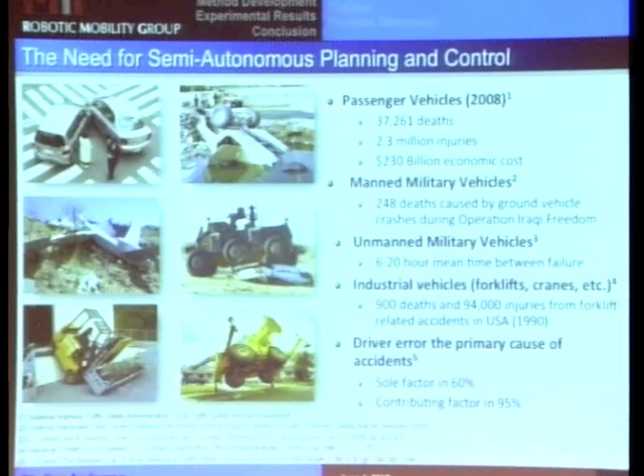There was a study done of collisions in the UK and the United States a few years ago in which human error was cited as a sole factor in 60% of collisions, and a contributing factor in 95%. So that's the statistic we're up against when it comes to overcoming human error.

I think a lot of people would ask, well, if human error is so detrimental, why not cut the human completely out of the loop? Why not a fully autonomous system? In fact, many autonomous systems have been proposed today that are very good, but for a number of reasons, we don't believe that humans will be ready for full automation for many years to come.

A few of those reasons include, number one, our superior judgment and reasoning. Particularly in military applications right now, the law on the books is that only a human can target and or fire upon an enemy combatant. For example, you don't want a bunch of Terminator-type figures running around shooting at combatants.

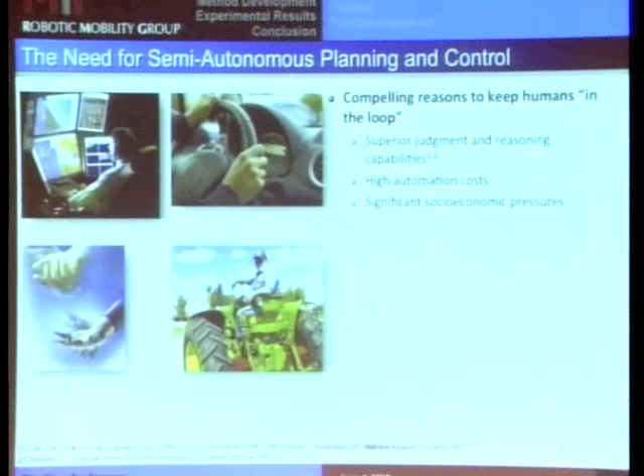There are high automation costs in many industries, and finally, there are significant socioeconomic pressures. In the United States, for example, were we to try to automate the transportation of goods, we would have significant conflicts with, for example, truckers' unions and others who would be looking at being out of a job were humans cut completely out of the loop.

So how do we do this then? Right now, the proposals sort of span two distinct sectors. We have full automation on one end of that spectrum, and we have ADAS, or driver assistance systems, on the other. Typically, as a general rule, full automation considers both strategic and tactical goals, with a planning component in a tiered subsystem architecture with a low-level controller.

Operator assistance, on the other hand, tends to be more tactical. It tends to be less predictive in nature and more focused on monitoring vehicle side slip in the case of stability controllers, or longitudinal side slip for anti-lock braking systems and traction controllers and others.

Where we are focused is somewhere between these. We've developed a semi-autonomous navigation system that aims to integrate some of the strategic elements of current autonomous systems, with regard to a capability of planning better routes for the vehicle if the human's inferred route appears unsafe, but also managing a lot of the low-level control aspects that will ensure the vehicle avoids collisions and losses of stability.

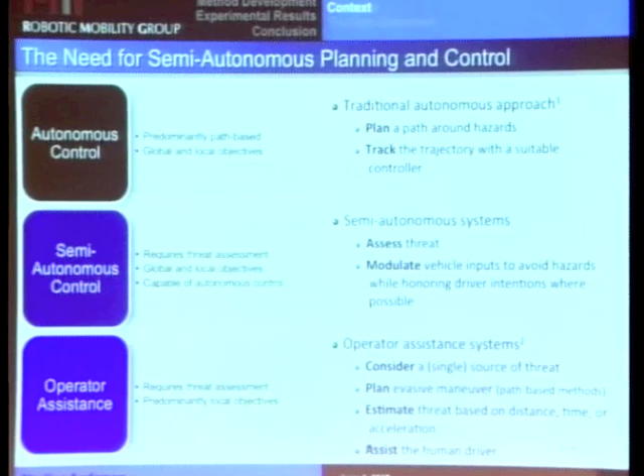So the basic approach to this, as I've outlined here: we assess the threat of a situation once we've designed a set of constraints, and we modulate or allocate control between human and machine in a fluid fashion to ensure that obstacles are avoided and collisions are avoided.

So some key questions that we have to answer when it comes to modulating control like this is: when do you assist the human, in what form, and how much? And all of this has pretty significant implications when it comes to human performance and human acceptance of that assistance.

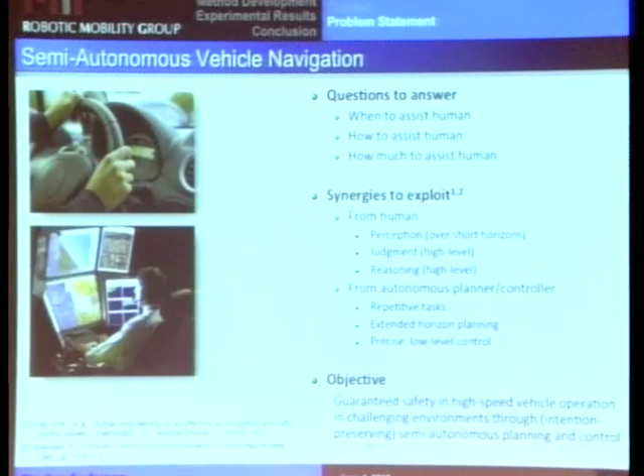Now, there are some synergies we think we can exploit between humans and automation. Humans tend to be a little better at perception, judgment, and reasoning. On the other hand, automation tends to be a little better at repetitive tasks, at precise low-level control. A lot of this was written about by our colleague Tom Sheridan years ago, and continues true in our research, and I'll talk a little bit about how it's borne out in some of our experiments.

So the key insight that's driven our approach - I'll use the phrase constraint-based a lot, and the reason for that is that's the principal differentiator of our work. We're focused explicitly on the design and selective enforcement of constraints rather than reference paths, which makes this work a little different, and in many ways a little better suited for this type of semi-autonomy. Here's the reason.

Humans tend to operate not along a specific path, but instead within a field of safe travel. For example, when you're driving a vehicle along the road, you typically see the lane that you want to remain within and constrain yourself to remain within it, rather than, except for maybe a few obsessive-compulsive disorder cases, controlling the vehicle only insofar as it keeps you within the lane. It's not super significant to you whether you're following a specific line on that lane.

And if we plan a reference path and control along it, a modular, fluid semi-autonomy approach can be over-restrictive at worst and arbitrary to the human at best. It can be difficult to determine, for example, if the human wanders two inches or a foot away from the line, is that when we start to apply control authority to get him back? Do we wait until he crosses the edge off of the lane into another? And so...

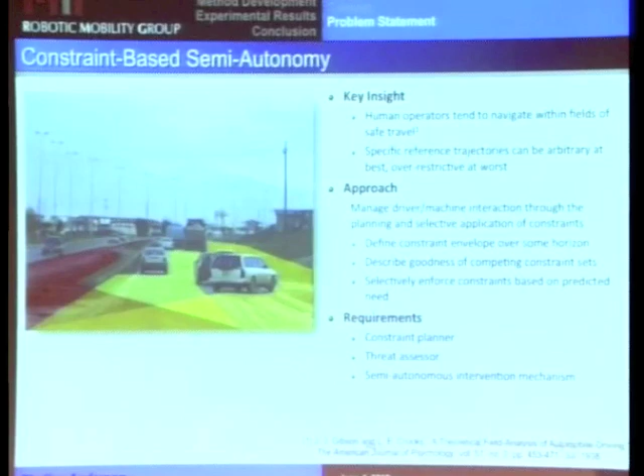We focus on how do you design the constraints that bound the region of the environment that the human should remain within? And then once you've designed those constraints, how do you apply them in such a way that you don't over-restrict the human from what he or she wants to do, but you also can ensure that any collisions are avoided?

So the requirements then are: first we have to design the constraints, then we have to assess the threat of the scenario - by threat I mean the nearness to instability of a predicted optimal vehicle path that satisfies those constraints. And then finally we have to design a semi-autonomous intervention mechanism, a means by which the autonomous controller can intervene when necessary to ensure that those constraints are satisfied.

So what you see here, overlaid on a typical view of an environment from a human's perspective, are three different path homotopies - I'll define that in a second - three different corridors or channels or fields of safe travel that you would typically identify as a first high-level identification of the environment you want to travel through. There's the green, the yellow, and the red, correlated with, typically you would likely see this green region as the safer one, in that it requires less immediate control action to remain within. But we'll get a little bit more into that.

First, I'd like to describe the system architecture. What we've done is use look-ahead sensing, which includes LiDAR and cameras for terrain and obstacle identification. From that, we pass a map of configuration space, or free space, to a constraint planner. That constraint planner identifies the feasible regions of the environment and designs constraints on the position of the vehicle, on its slip and other stability states, as well as on its control inputs, to ensure that it remains within that.

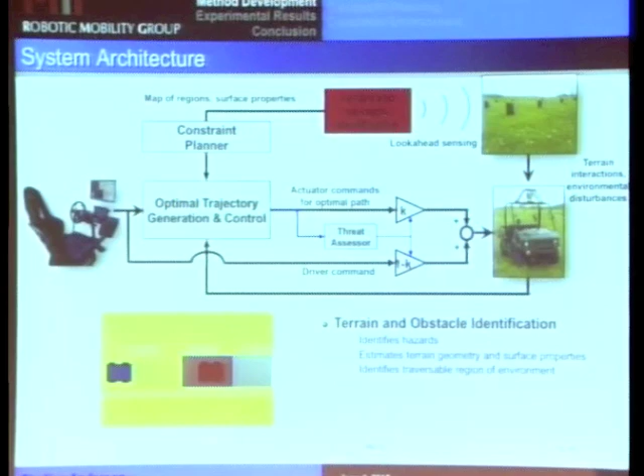And that is identified here by this red bounding. You'll notice that prior to that constraint planning step, going right or left would have been deemed a wash. But we've got to decide that a set of constraints cannot include any of these collision states. The constraint planner chooses which is safer.

And then we have an optimal trajectory generator and controller that's being done with model predictive control with a model of the vehicle. So that plans an optimal vehicle trajectory through those constraint sets that satisfies them and calculates an optimal sequence of control inputs.

Now, as those of you familiar with model predictive control will already know, a model predictive controller gives you, along with the sequence of optimal control inputs, also a sequence of optimal vehicle states, right? Each one of which needs to satisfy a set of stability critical limits or constraints as well.

For example, the slip on the tires, typically the tire friction force saturates around 6 to 7 degrees of slip on a passenger vehicle. Therefore, if you monitor each of these predicted states, if any of those approaches that limit, the edges of the stability envelope, that implies a high risk, or that even an optimal trajectory is getting near to the limits of vehicle stability, and there is some need for intervention to avoid losing control.

Finally, a threat assessor does exactly what I just described. It looks at the predicted states, assesses how close we are to instability, and in accordance with that nearness to instability, it makes a decision as to how to allocate control between the human and the controller to ensure that we avoid collisions.

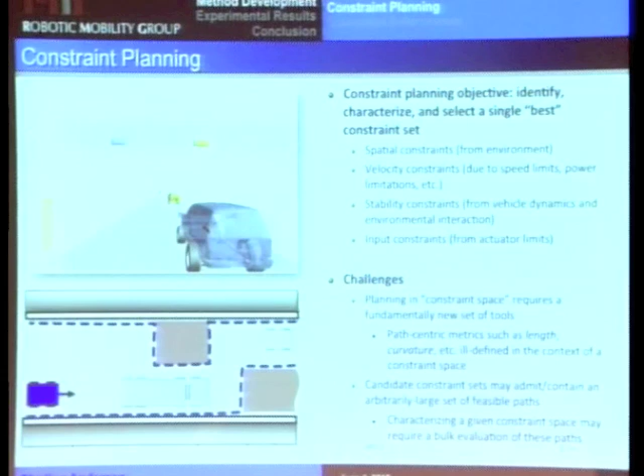What we're focused on is how do you design constraints to bound those. Here you'll notice a simulation where I've overlaid the blue vehicle with the controller in the loop. The gray is what it would have done given a zero driver steer input. And what it's doing is planning constraints around these objects in the environment, or the collision states, and then using the model predictive controller in this semi-autonomous fashion to intervene, where the intervention is shown in green here as a percentage, in order to avoid these obstacles.

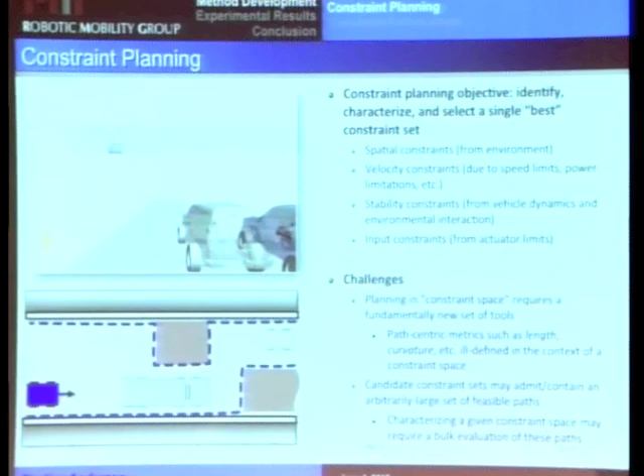But here, the challenge with designing constraints—we're all used to designing paths, right? And a lot of path planning literature has been developed for a long time. But when it comes to designing constraints, it becomes a little bit more difficult to characterize, for example, what's the length of a constraint? What's the width or curvature or dynamic feasibility of a constraint? All of these terms and metrics are well defined when it comes to path planning. They're not well defined when it comes to a set of constraints which can bound an infinite number of vehicle paths. So that was the challenge we set out to address.

And we wanted to figure out how exactly do you characterize the goodness of a set of possibly infinitely many homotopic paths that pass through an environment. Let me just describe this word homotopy before I go on. For those not familiar, a homotopic class is any set of paths with the same starting and ending point that can be continuously deformed without crossing obstacles.

So for example, in the common driving scenario, a homotopic class would be a lane. If you were out in unstructured terrain, a homotopic class would be any set of paths you can take that takes a certain route through the trees.

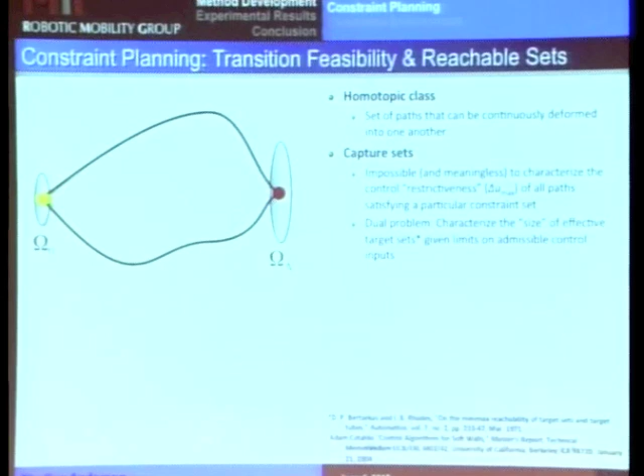Now, one of the important considerations for us with regards to homotopic classes was that each path in a homotopic class has to traverse a specific capture set. When I talk about capture sets, what I mean are any of the set of states that exist within that homotopic class across which every path existing therein will cross.

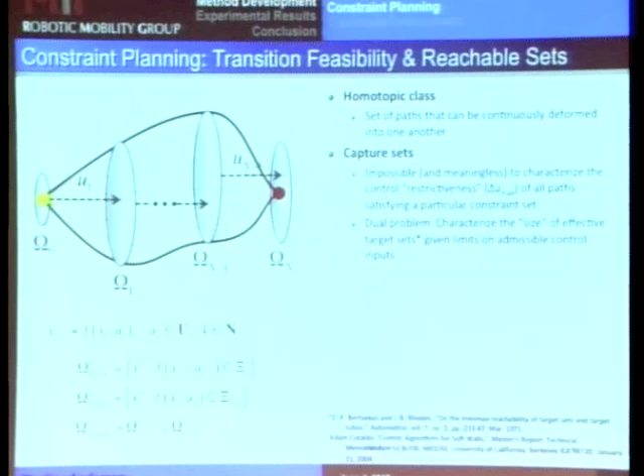And as the vehicle—if we use a number of metrics, which for the sake of time I won't get into, to describe how the state evolves from one capture set to the next, we can describe the bulk dynamic feasibility of a constraint set.

And that, in essence, becomes our metric for goodness of a given constraint set. As you'll notice, there are a number of constraint sets that could exist. We could have taken any of these homotopic classes, but using some geometric constructs, which you can read more details about in the paper, we can design a chosen homotopic class.

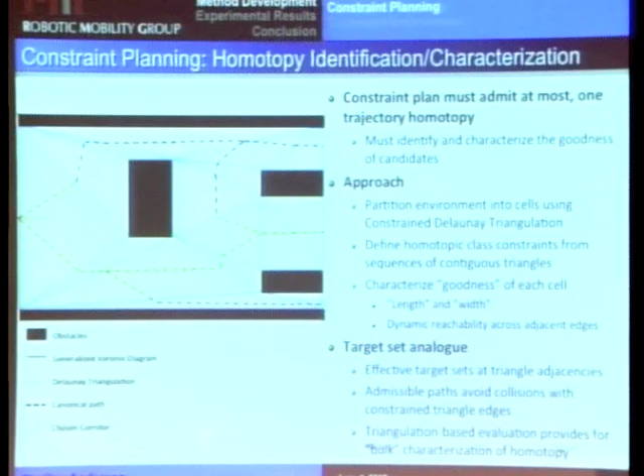Now, some of you will notice that this looks an awful lot like, when we use constrained Delaunay triangulation, some of these metrics look a lot like the Voronoi diagram. The reason for that is quite simply that the Delaunay triangulation is the geometric dual of the Voronoi. So that gives you some indication of the length of the medial path that traverses a given homotopy. So I'll skip through that.

So what I want to describe now is how we enforce those constraints, what the mechanism is for semi-autonomous intervention that we've used to ensure that we can traverse this homotopy without colliding.

As I mentioned, low threat means those predicted states are far away from the bounds of vehicle stability. High threat means they're very close. What we do is configure the controller to satisfy constraints while minimizing any of a number of vehicle states that indicate stability. It can be lateral acceleration; in our case, we use front wheel side slip. And we call threat the nearness to instability, as I've mentioned.

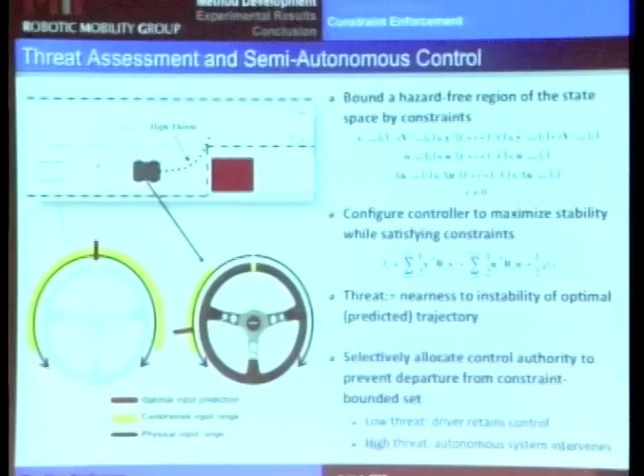Here you'll see a simulation showing what was happening in that vehicle simulation I was showing you earlier. The trace of the vehicle is here in blue. The red is the predicted trajectory of the vehicle, and the green are the constraint sets. You'll notice that as the predicted trajectory begins to bend, the predicted states become nearer to the limits of stability, and in accordance, our control authority is allocated here.

When control authority allocation is 0, that means the human has full control, which is as we'd like it to be. As a need for intervention arises and the human does nothing, that intervention increases just enough to ensure that the controller can turn the vehicle around and satisfy the constraints.

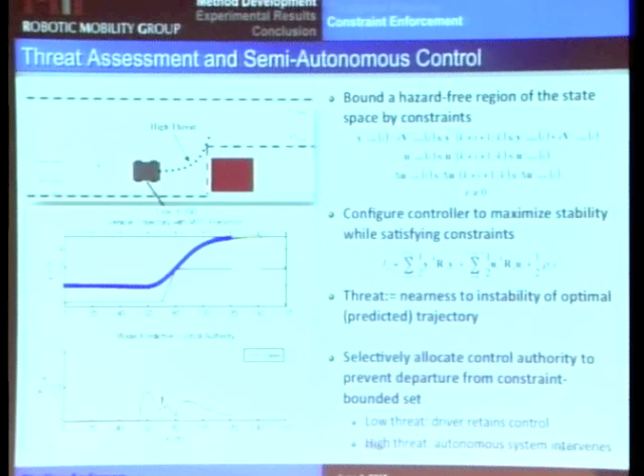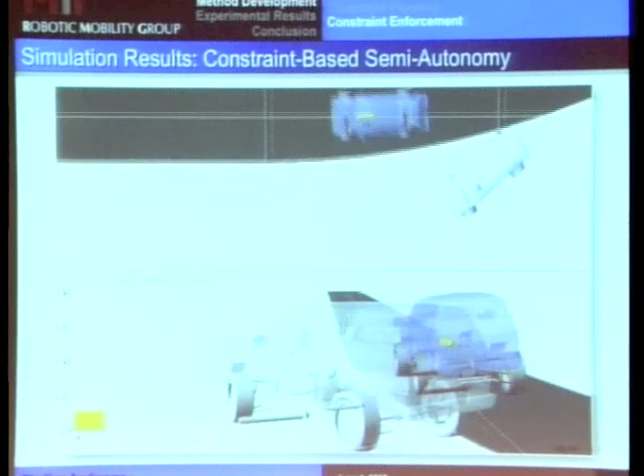So here you'll see again, the blue vehicle shows with semi-autonomous controller in the loop. Gray vehicle shows without it. Here I've used a poorly tuned pure pursuit controller for my driver model, and that shows that I tuned it poorly for a reason, just to demonstrate that the same driver model is being used in both cases.

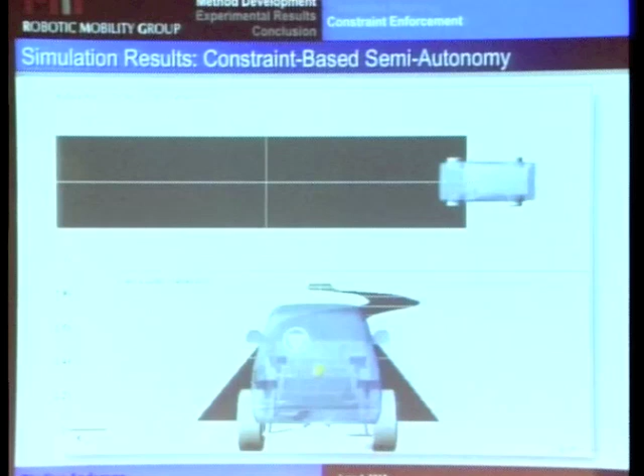Here on the left, it shows you how much control authority is being allocated to the controller in the blue case. I would note that for a lot of drivers, for example when we had some drivers up at Ford test this for us, you don't notice intervention below about 60%. It just kind of feels like you're doing a great job, and you're not sure how much the controller is intervening, and that's as we'd like it to be.

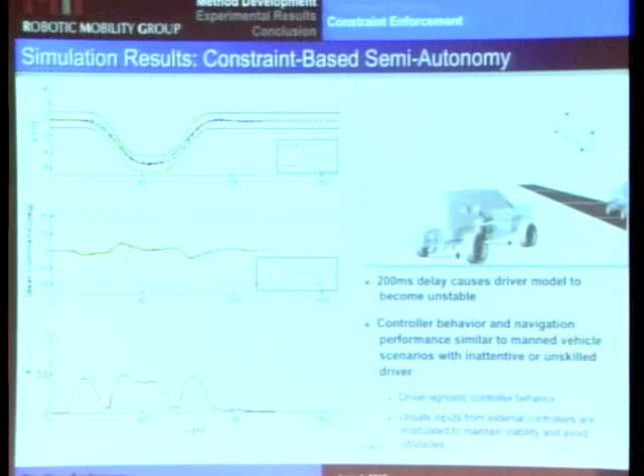So if we introduce a delay, here's the trace of the vehicle path. You'll note, as I mentioned, we're only imposing constraints on the position of the vehicle; we're not imposing a reference path. But the interesting thing here is the reference path for the driver model is the very center of this lane, this blue dashed line. Notice that when the controller is off, in the gray case, the driver in this yellow line loses control and leaves the roadway.

When the controller is on, not only does it stabilize and keep the vehicle within the lane, it enables the driver to keep it closest to whatever reference path he or she would like, which, as I mentioned, drivers don't typically choose reference paths, but if they had, or if they did, this is actually an enabler. Notice how the trace of the vehicle, the red line, actually stays very close to what the driver model in this case is trying to track.

Another place where this works quite well, and will motivate the final set of experiments that I'll demonstrate, is in teleoperation scenarios. In teleoperation, one of the big problems tends to be time delay, both in sensing and in control. There's a 200 to 500 millisecond delay between when control inputs are sent and received at the vehicle. That time delay tends to destabilize a lot of drivers. And here I've done the same scenario, but with time delay, and we get a very similar outcome.

If we run this controller on the vehicle itself, and therefore not subject to that same time delay, it is again able to stabilize the vehicle while still allowing the human significant control when the human's inputs are safe.

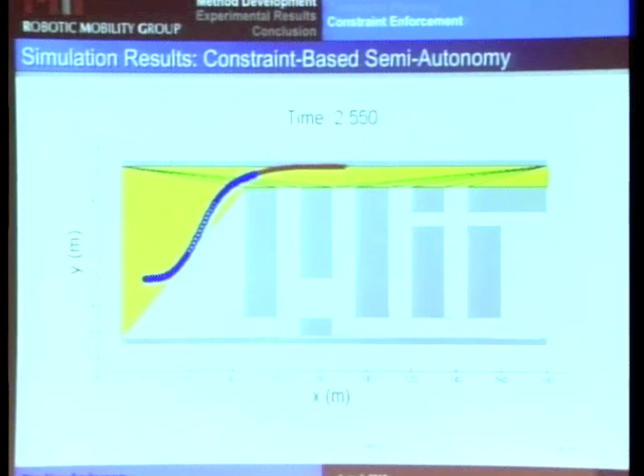So here I'm just demonstrating the same controller as it would be performed through an arbitrary obstacle space. Here the constraint planner is planning via these Delaunay triangles. If we throw in an additional obstacle, a naive path planner would have chosen this sort of tortuous path, which is unachievable via model predictive control. If instead we integrate the capture set or dynamic considerations, it in fact plans what turns out to be the better homotopy.

Finally, I want to show how this has been implemented in an experiment on a teleoperated vehicle, and then we'll take a few minutes of questions.

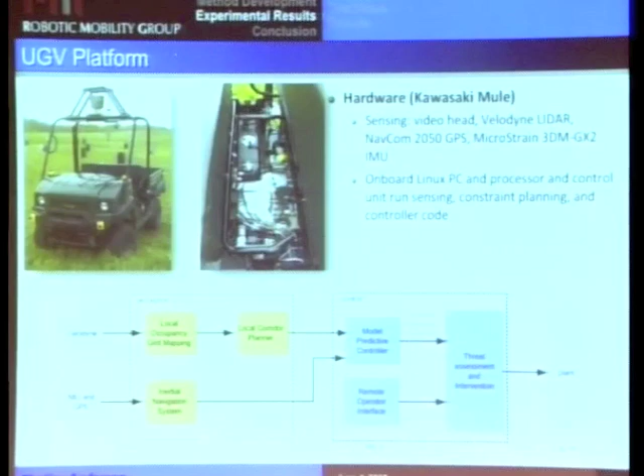The hardware we're using is a semi-autonomous Kawasaki Mule, developed in collaboration with our partners at Quantum Signal in Michigan. Sensing is done via Velodyne LiDAR, and we've got a video feed up front for the teleoperator to view, a Navcom GPS, and a microstrain IMU. We've got a PC on board running the control code, so it's not subject to latency or communication issues.

For some of our tests we've given the operator, who's just an untrained guy with a driver's license but nothing more, a task from a teleoperated station inside a barn where they can't see the vehicle via line of sight, relying only on the monitor. We want you to navigate this vehicle from start to the other end of an obstacle field, and we don't want you to hit any barrels.

We're going to throw challenges at you. Number one, we're going to cut out the video occasionally, so you'll be driving blind, which would be common if sensors or cameras were obfuscated by sand, fog, or otherwise. We've also asked them to perform a secondary task on a different computer, common in military applications, and we've introduced communication delays of 500 to 2,000 milliseconds. We've done over 400 user trials to date with very good results, which I'll describe.

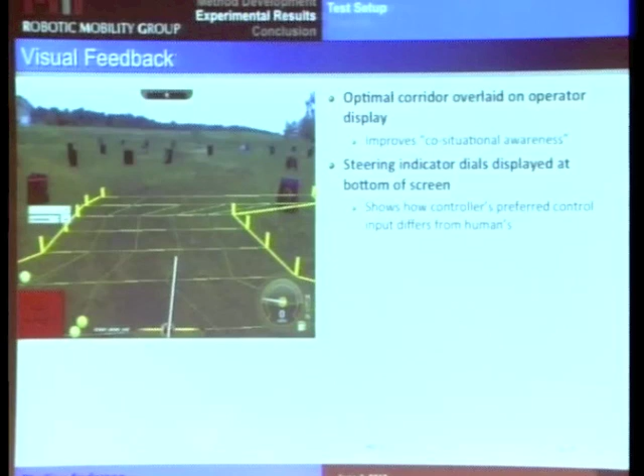There are a couple of feedback mechanisms we wanted to provide to the human. Number one, and we're quite excited about this: when we plan these constraints, since humans already tend to operate with this sort of constraint frame of mind, we can help the human identify the preferred homotopy, the lane - we call it the yellow brick road - that would be best to follow for dynamic and safety considerations. That's overlaid on their screen along with an indicator of what the vehicle is doing. Here's another example of that.

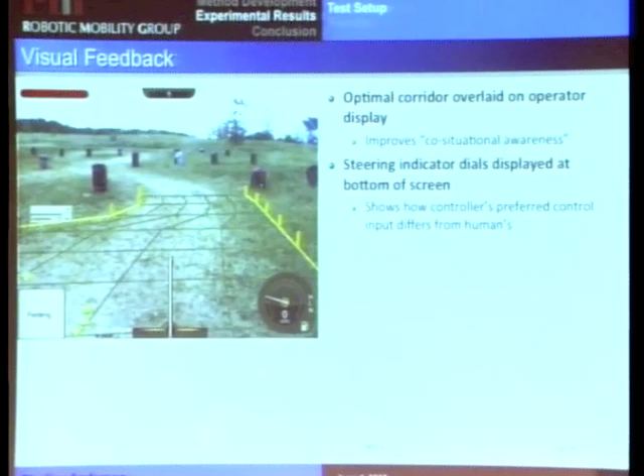We won't talk about this today, but we've also recently started testing a reduced fidelity sensory feedback where they don't even get video. All they get is the yellow brick road being sent from the sensing computer, so we can reduce bandwidth substantially. All they see is this, and they actually tend to perform quite well - they can stay within the lane we've outlined for them.

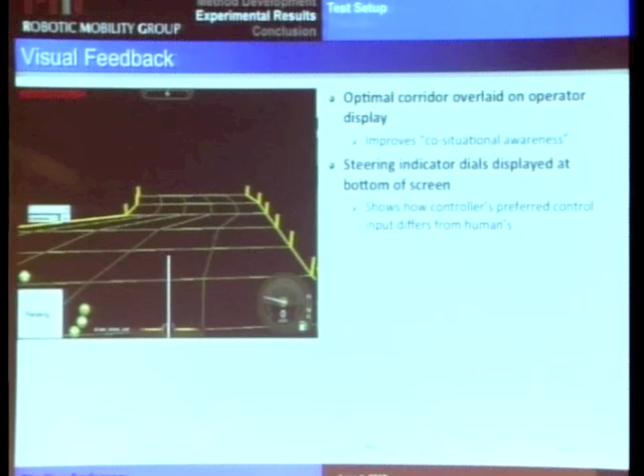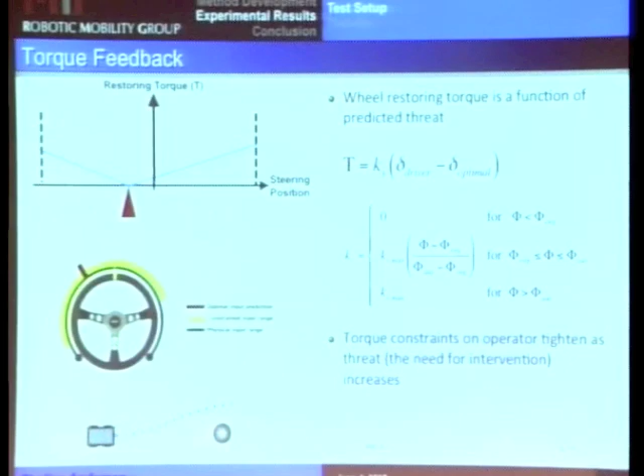I'll skip through this briefly, but we're also providing torque constraints or torque feedback to the human. The way we're doing that is: here's the optimal input, and as the vehicle approaches something and that optimal input becomes more urgent in order to avoid the obstacle, we increase the stiffness on deviation from the controller's optimal input. So what ends up happening is the steering wheel begins to pull one way - not that the operator allowing it to go that way is critical, because the vehicle will do that regardless - but with the objective of improving the operator's situational awareness, we move the steering wheel towards where the vehicle is actually going, so they know what's happening.

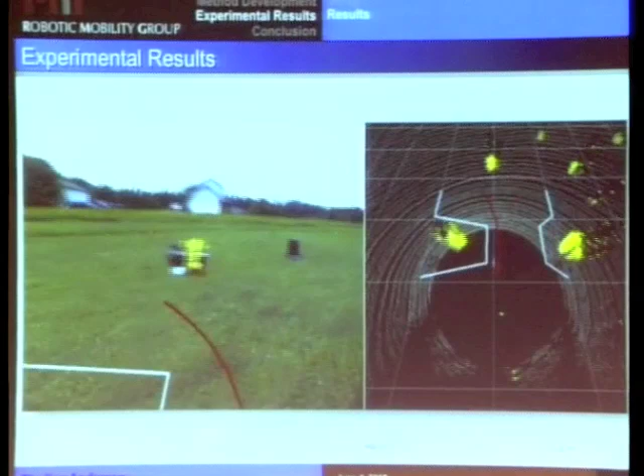Here's a video illustrating this approach. You'll notice the cyan lines are the constraint set - you'll see the corridor through there. The red is the predicted trajectory.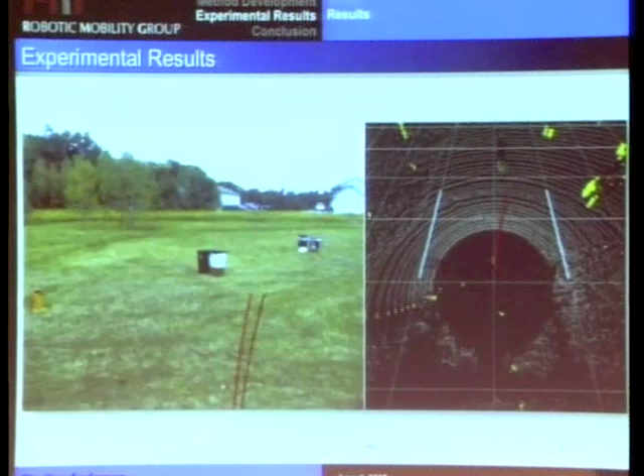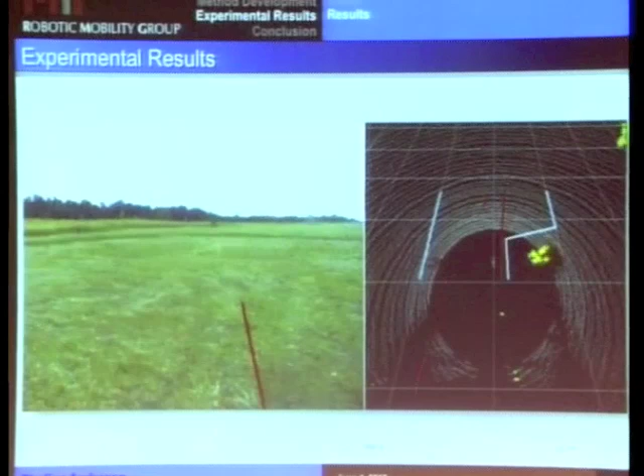Notice that in most cases, as the driver drove through, we allowed those constraint sets to change as the driver pushed the vehicle to one side or another. But as we came close to the bush here at the end, that was deemed a critical constraint, and we didn't allow the driver to collide with that.

This controller tends to reduce oscillation in the driver commands when there's delay. Here's with the controller, and there was without.

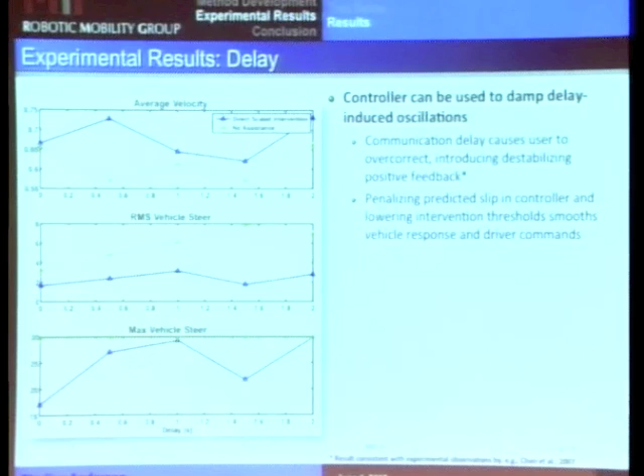We also show a number of improvements in, for example, average velocity. Drivers tended to feel more comfortable with the controller in the loop because they didn't feel like they were going to hit things, and they drove a little faster. They used less of the steering in every scenario without our controller in the loop. The driver saturated the steering input at one point or another; with it, they didn't.

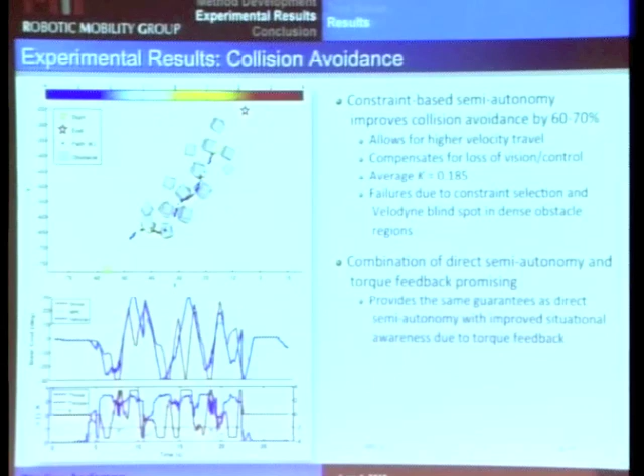I'll let you read through the paper to see more of this, it's a little difficult to see here. But bottom line, the constraint-based semi-autonomy improved collision avoidance by 60 to 70% in each of these trials. We attribute that final 30 to 40% margin to the significant blind spot we have with our current LiDAR setup, which we've since resolved, but it's definitely in the results you'll see in this paper.

That's about it, I'll just conclude briefly. We've designed a constraint planning mechanism that, as far as we can tell, is novel. We designed a mechanism for allocating control between human and machine to ensure that the human's inputs are honored where possible and overridden where necessary, and only as much as necessary to avoid collisions.

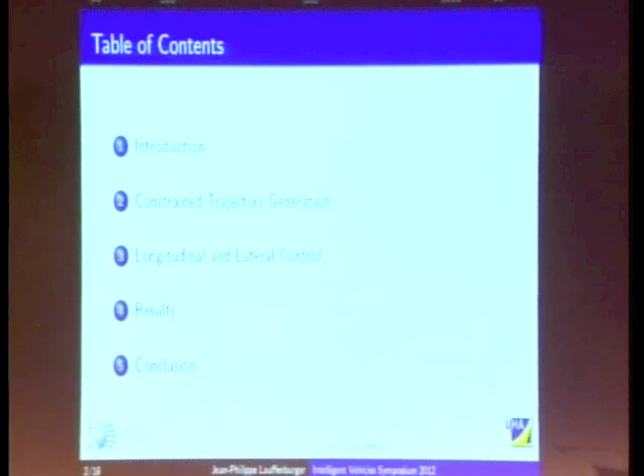The outline of my presentation will be as follows. I will briefly introduce the topic, then focus on the two main parts of the presentation: constrained trajectory generation and the use of this reference generation for longitudinal and lateral control of car-like vehicles. Then I will show some simulation results before a conclusion.

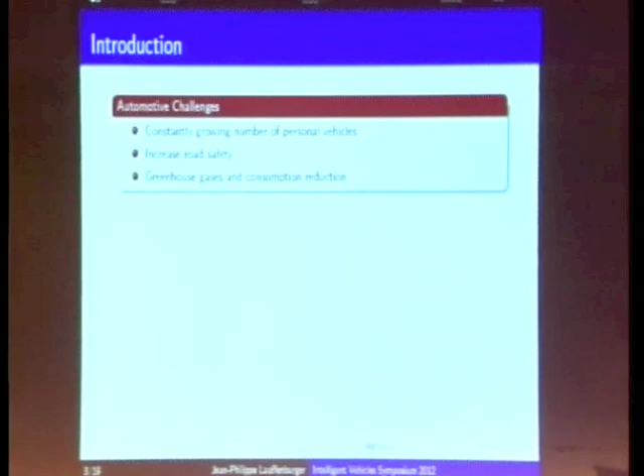Currently, car manufacturers and researchers have to deal with three main issues. The first is a constantly growing number of personal vehicles on the roads. At the same time, we would all like to increase safety during driving situations. And also the third issue, which is growing currently, is to try to reduce greenhouse gases and fuel consumption of our cars. Keeping the balance between these three aspects will be quite challenging for the next years.

If we look at solutions based on driver assistance systems, there are currently a lot of available systems on the market, ABS, ESP, and so on, but none of them, or roughly none, are integrating the ecological aspects of gas emissions or consumption.

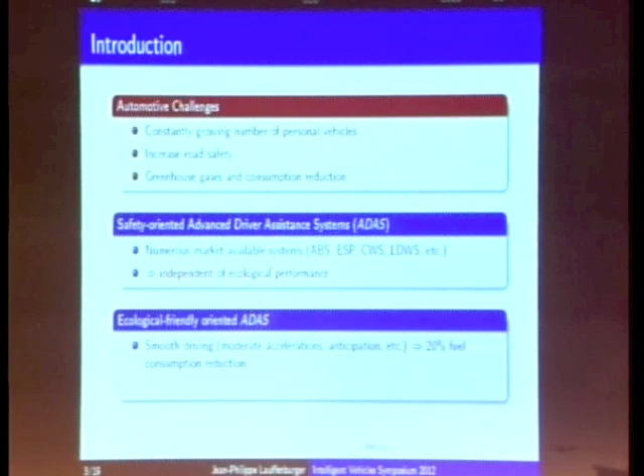One emerging field of research is to develop ecologically friendly, so-called eco-friendly driver assistance systems. This morning we had a presentation from Chris Hermson, who mentioned that smooth driving can lead to effective fuel reduction, more or less 20%, based on recent studies from 2010. What is smooth driving? It means using smooth accelerations to anticipate traffic congestion, but also driving perhaps under the legal speed limits. Unfortunately, there are only a few studies dealing with this approach. I saw last year at the IV conference only one paper dealing with fuel reduction in ADAS systems.

The final goal of our work would be to develop a driving assistance system which integrates safety and ecological aspects. But here the main topic concerns the first step of this development, which is a coupled control strategy based on longitudinal and lateral control of the car.

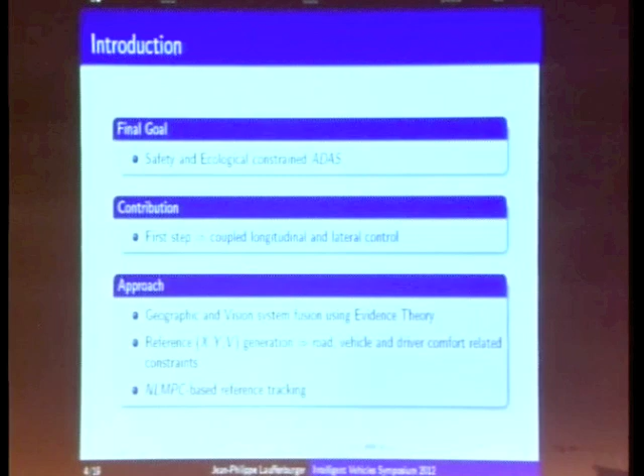Our approach is based on the use of a perception model presented last year at the conference. This is a fusion between a navigation system based on a digital map database and a vision system that detects traffic signs, especially speed limit signs. Based on this information about driving situations, we define a reference trajectory and a reference speed profile for the longitudinal and lateral controller. Finally, the control aspect is done using a nonlinear model predictive controller, which was introduced by Sterling just before.

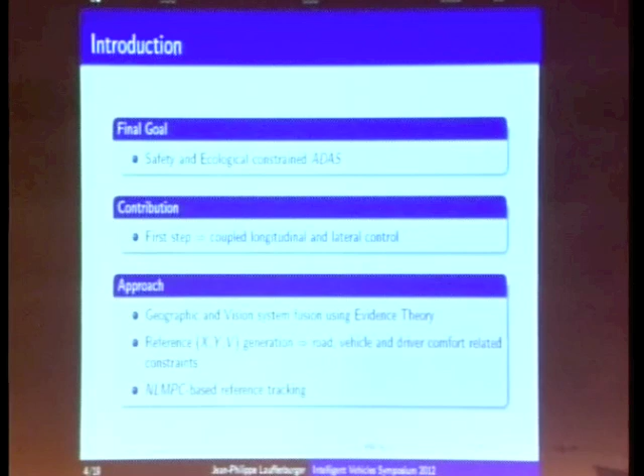Let's have a look at the vehicle guidance principle we have adopted. Considering the vehicle with steering actuators and propulsion actuators, the engine, the first idea is to perceive the environment of the vehicle using a speed limit assistance system. I will not go into the detail of this system, you can find references in the paper. The main idea is to detect and inform the driver about the speed limit he should not exceed during his driving task.

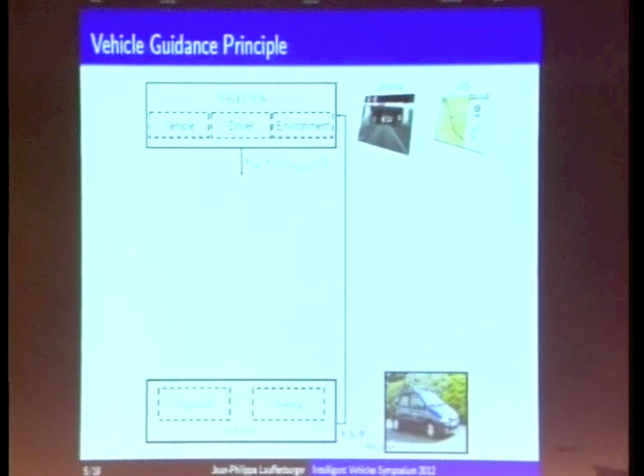Once we've located the vehicle on the map, we are able to compute two references: a trajectory reference and a speed profile reference, which are then used by the controllers, namely the lateral controller based on an MPC solution. So we'll go first into the detail of the reference generation module and then into the control module, which is the core of this presentation.

So if we consider that the vehicle must go from a starting point to a given destination, and that this track must be on the road, included in the boundaries of the road, we can, by considering the vehicle and the width of the vehicle and the width of the road, define what we call a validity area in which the trajectory can be constrained. This means that during this particular path, the center of gravity of the vehicle should not go out of these constrained boundaries.

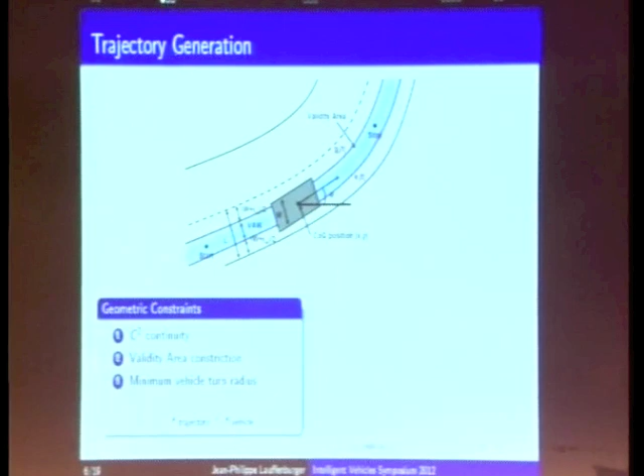We can also add on top of that some other geometrical constraints. For instance, the curvature continuity constraints, which will be important for the steering, and also some constraints related to the geometry of the car, so the minimum turn radius. And we can also integrate in this optimization problem some kinematic and dynamic constraints in order to avoid, for instance, excessive lateral accelerations.

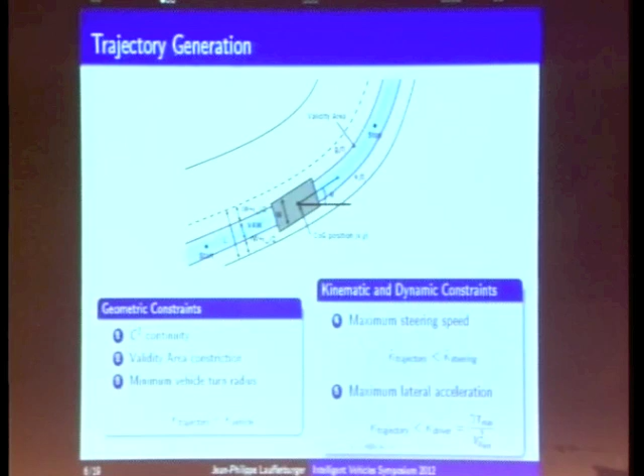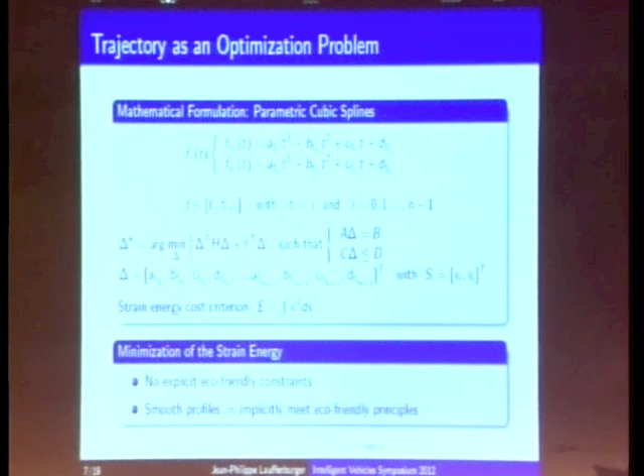So, what is the idea about minimization of the strain energy? The idea is that if we have smooth trajectories, without high variation of the curvature, we should probably implicitly meet some eco-friendly concepts. So the smoothness of the curvature will allow us to have a smooth trajectory, as mentioned this morning by Chris, and then probably be able to reduce the car consumption.

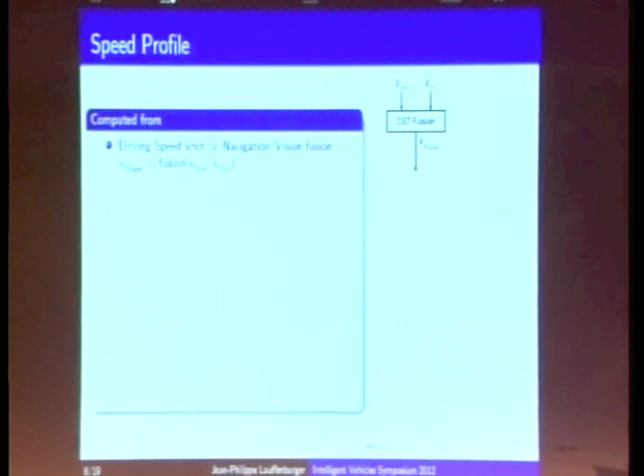Let's talk now about the speed profile which will be associated to this reference trajectory. So first, one speed information will be provided by the perception level, the speed limit assistant, which uses the detection from the traffic signs with the information provided by the navigation system.

After that, we are also taking into account the road topology because the speed profile should match with the generated trajectory. So based on the reference trajectory and its curvature, we are computing a speed limit profile using a very simple model defined in the literature, which only limits the lateral acceleration during that path.

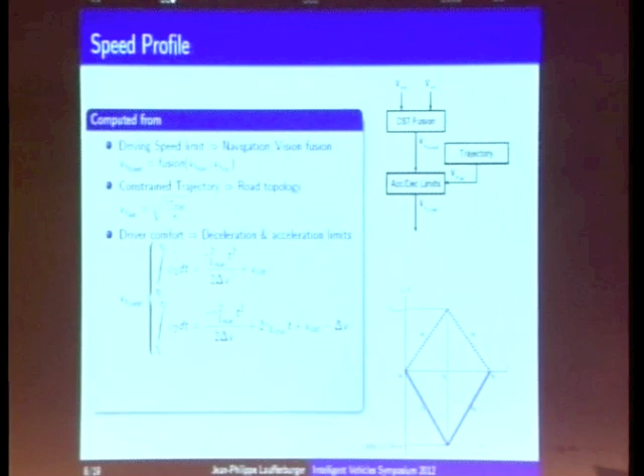Finally, we have also integrated some comfort aspects in order to limit the variation of the decelerations and accelerations given by the driver. These are comfort aspects, but smooth deceleration and acceleration are also related to fuel consumption. So the idea is to use a triangular shape for the acceleration or deceleration phase and to recompute in real time the speed profile in order to adapt it to this triangular deceleration or acceleration shape.

And the last step is a verification of the speed limit of the speed profile which has been generated, in order to ensure the stability, the lateral stability of the vehicle.

So now that we have a better idea about the reference that we are using for the controller, let's see how we've implemented these controllers.

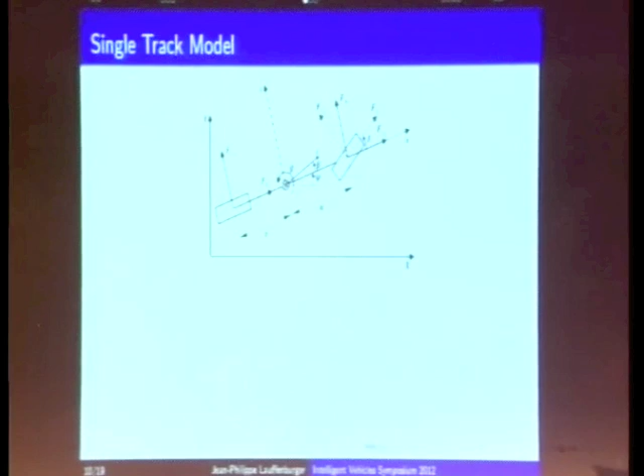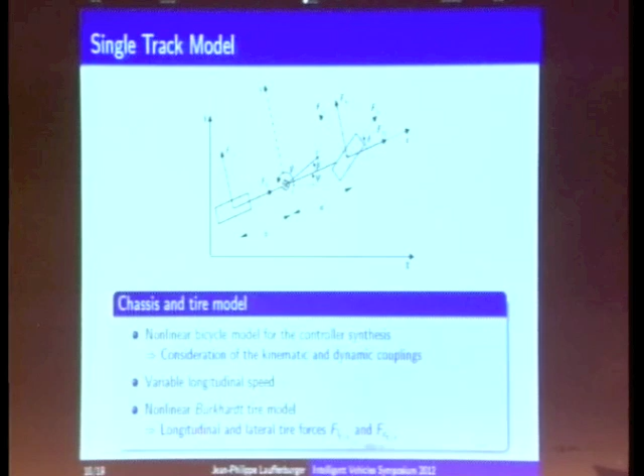So the nonlinear model predictive controller is based on the single track model, a very famous model. We are using a nonlinear bicycle model for the controller synthesis, which allows us to consider coupled dynamics and kinematic constraints. It is used under the assumption of variable longitudinal speed. Our speed profile will not be constant during the whole path, as I will show in the simulation. And finally, we've integrated in this model a nonlinear Burckhardt tire model to estimate the tire forces.

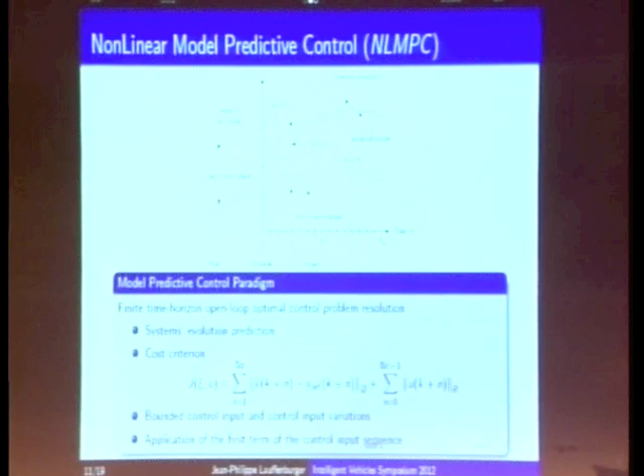I will probably skip this slide briefly since it had been presented previously by Sterling. The idea is just to recall the assumptions of model predictive control. If you have a reference trajectory, the model allows you to define the predicted output of the system. Based on this predicted output, by minimization of a cost criteria, you can define the control sequence for your system. Basically, you can also add some constraints on the control inputs and on the control input variations to limit their values.

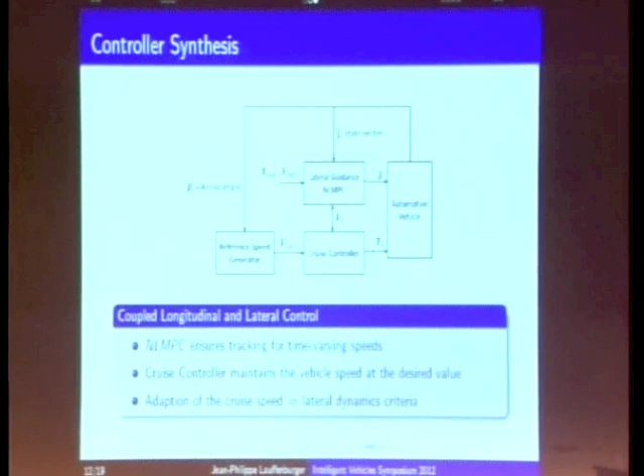So the scheme that we have adopted here in this work is presented here. We have our lateral guidance system based on the NLMPC and a classical cruise controller to maintain the reference speed, and the coupling is ensured by the variable speed, which is considered by both systems. The NLMPC ensures the tracking for time varying speeds, and the cruise controller allows maintenance of the vehicle speed. This variable vehicle speed has some effects on the lateral dynamics of the car.

So now let's go to the results that we have obtained with this solution. First I will show you the implementation on our test car. This part has been completely implemented on the test car and validated in real-time conditions.

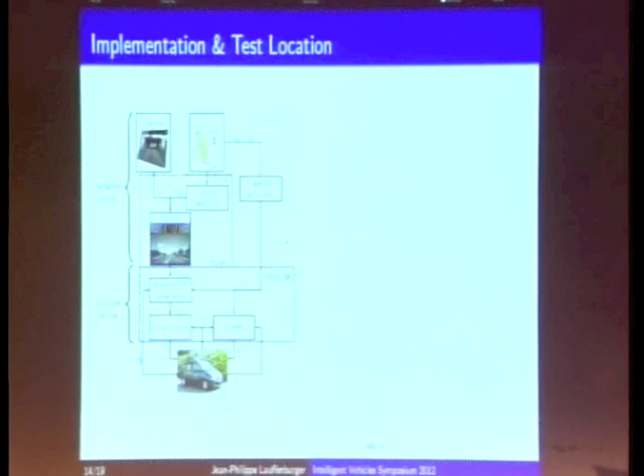So we are using the navigation system provided by Navteq, called ADASRP, to locate the vehicle and generate in real time the trajectory using the spline model. The data from this navigation system is fused using RTMaps software from Intempora with the camera detection of the traffic signs. Once we get this information and the reference trajectory, we use these references to generate the speed profile and then do the simulation in MATLAB Simulink for control of the car.

This part is validated offline, so in simulation.

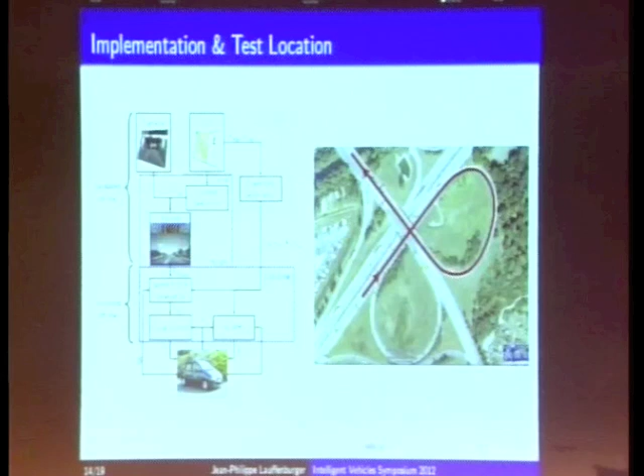The test I will show you represents one sequence recorded on a typical highway close to the university in Mulhouse, in the east of France. We'll go through a highway exit ramp before a variable radius curve, then reach another highway and perform a lane change before getting into the next highway section. We will have an important speed, 110, and will then have to sequentially brake until 50 kilometers and maintain 50 kilometers, which is the legal speed limit for the whole bend, before reaching the straight line.

This first video shows the results of the perception and of the SLA, the speed limit assistance system. You will see here the trajectory, the path that we will follow. On the right side, you will have the information provided by the navigation systems after an internal fusion of some information. On the left side, the results of the speed limit traffic sign detection, and in the middle, the results of the fusion.

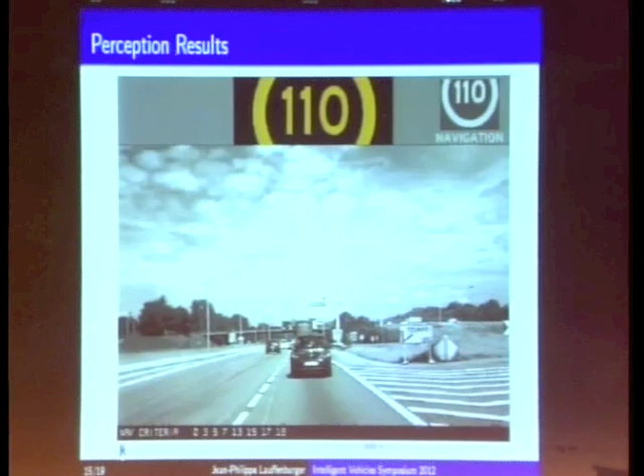This has been recorded and these tests have been done in real time, and at the same time we've computed the reference trajectory which will be used for the control. Here we will follow this car, take this exit bend, and you'll see that we have detected a speed sign limiting the speed to 90 kilometers per hour, and then we will take progressively the right turn.

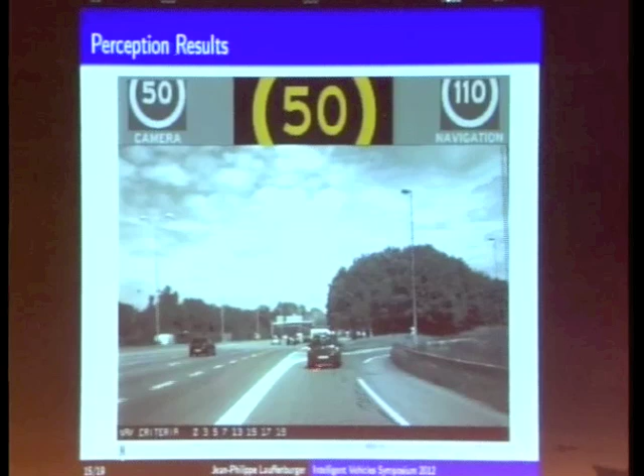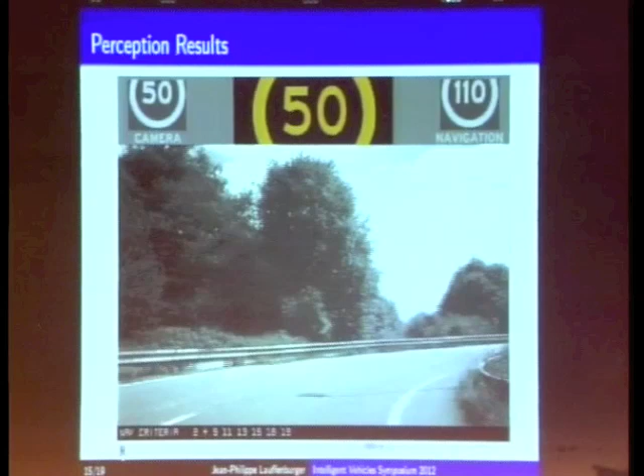A new traffic sign has been detected and the system already changed. Now the speed is limited to 50 kilometers until the end of the bend. Here we are in real-time conditions, so we are really driving at 50 kilometers, even if you can see that probably we could drive faster in this situation, which is not legal.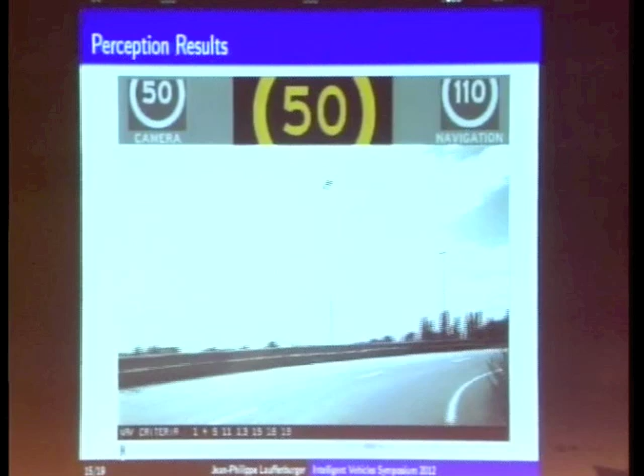Just after the bend, in order to enter the next highway situation, we will have to do a lane change, but which will not be presented here. So from here, we will have to do a lane change to reach the next section.

Now let's see the trajectory which has been generated and the speed profile adaptation which is performed. I will just stop the video in order to give you some explanations.

Here on the right top plot, you can see the reference trajectory based on splines, which has been generated for the whole pass. This is just a section of that trajectory, presented here in red. So it's just a section trajectory with the corresponding speed profile.

Based on the detected information or detected speed limit by the SLA, we have to change the speeds from 110 to 90 to 70 and to 50. By integrating the different criteria we've mentioned, we smooth this speed profile in order for it to be used by the controller. Using the triangular shape of the deceleration, you can see that the speed profile is smoothed.

If we go through the whole simulation, you will see that each time the system has to decelerate or reaccelerate, we completely smooth that speed profile. And that's throughout the whole turn, the whole bend, because now we are completely in the bend, the speed is lower than the legal speed limit. So this should probably have some positive effect on consumption.

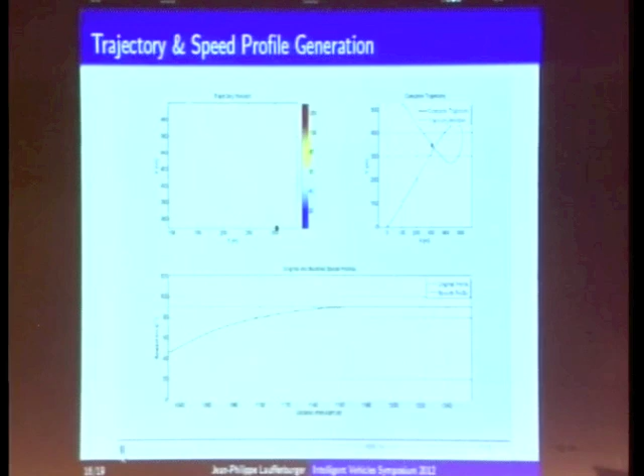So that's it. Now let's see the results of the lateral controller. For these simulations, the vehicle has been simulated by a 4-wheel 2D nonlinear model.

It's not working. Okay.

We've considered that the road is flat and that we are on a dry surface, so with maximal grip. And finally, that the control inputs are the steering wheel and the wheel torque.

Here you have the results of the path tracking based on the NLMPC. You can see that the system effectively tracks the reference path, and that the speed has also been tracked quite correctly.

There is some basic overestimation of the heading angle. This section here corresponds to the lane change.

This is probably the limit of the model predictive controller we've implemented here, but overall the reference trajectory is well followed, and also the speed profile.

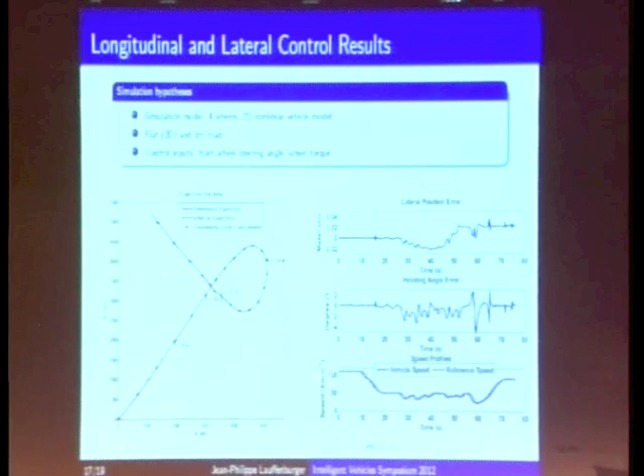Coming to the conclusions, I've presented a coupled longitudinal and lateral controller for automated guided vehicles based on the data fusion between two relevant and complementary systems, which allows access to very important geographic information.

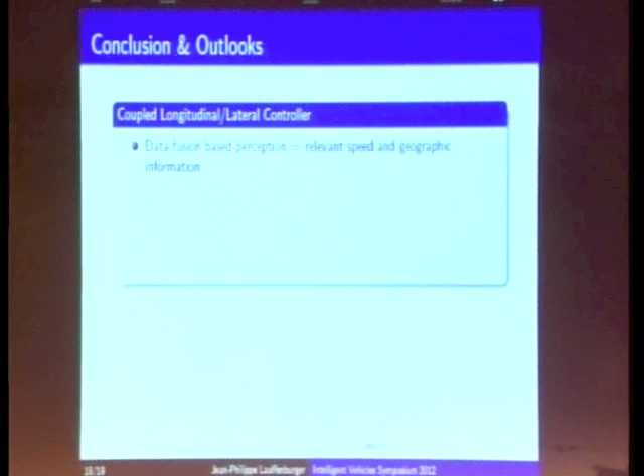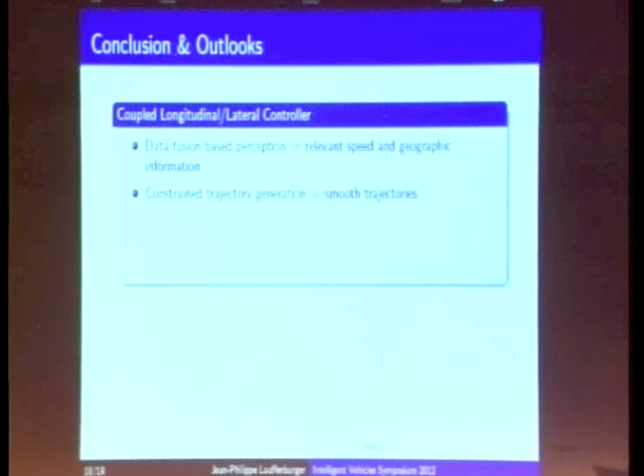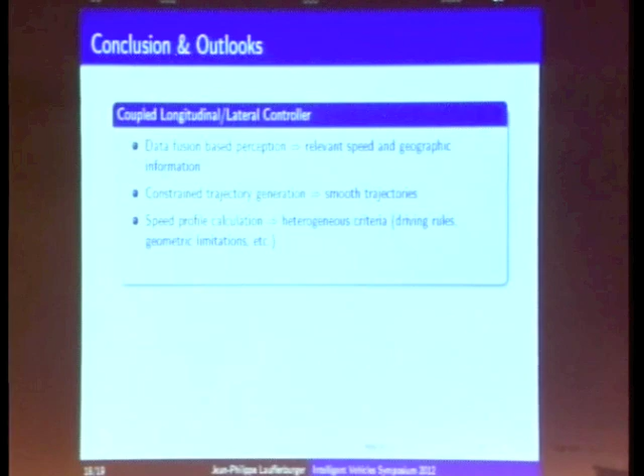I've also shown how we've developed a constrained trajectory generator for the lateral controller in order to obtain smooth trajectories, and finally how we are computing a speed profile based on several criteria related to driving comfort, lateral dynamics, and longitudinal dynamics.

Finally, we saw during the simulation that this coupled control provides safe and effective tracking in simulation.

The outlooks of this work will first be focused on the implementation of the lateral controller on the car, and probably we will have some other results during test tracks.

And finally, the real integration of explicit ecological-based criteria. I showed in the presentation that until now we are only considering implicit criteria related to these ecological aspects.

Thank you very much for your attention, and I'm ready to answer your questions.

Did you have any constraint on the acceleration? Yes, with the triangular shape of the acceleration profile, we can fix the maximum we want to reach, or the minimum for decelerations. So that can be fixed.

But from the graphs, it looked like they accelerate quite slowly. I guess most drivers would like to accelerate faster.

In the simulation, I think we used a deceleration of 3 meters per second squared, and the acceleration is a little bit lower, which corresponds to traditional values found in the literature related to driving comfort. Thank you.